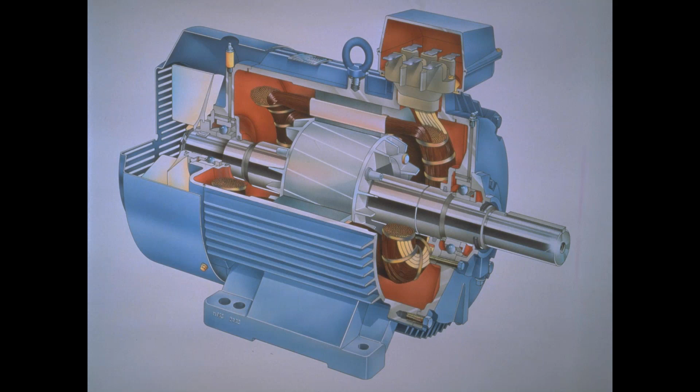So you have a rotor, we have a stator, we have windings and insulation, we have this housing, we have the fan on the back. You can see a lot of different components here that can actually fail while the motor's in service. Sometimes these components fail while the motor's in storage, and we'll talk about that as we go through the presentation.

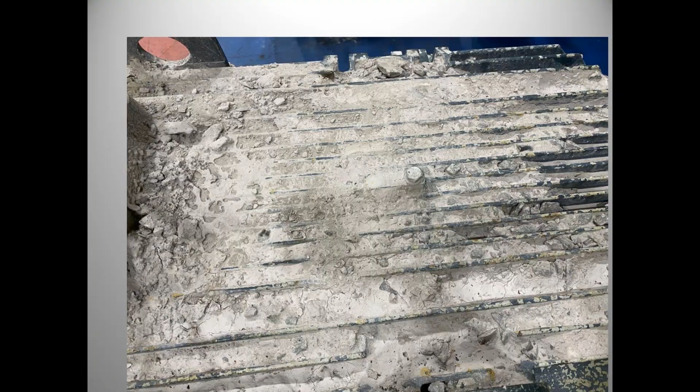This is a picture I took of one of my customers, but this motor was sitting on the shop floor, and I asked why the motor failed, and they said it just overheated and stopped turning. Well, it overheated and stopped turning because you have all this product on there. The motor couldn't cool itself, was probably one of the reasons that it got hot and failed. So you see these kind of things in the industry quite often.

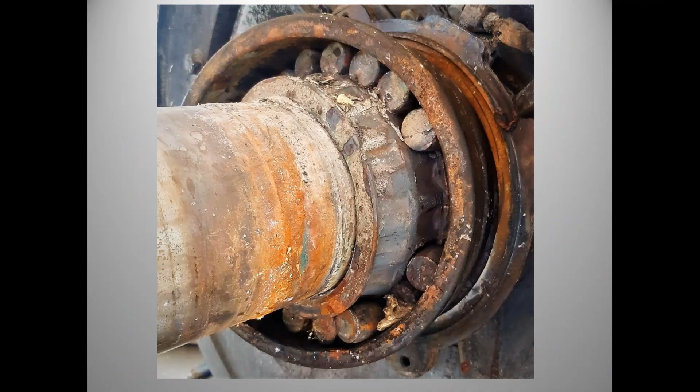Here's a large motor, this picture was taken at a mine down in Suriname, and again, large motor, but you can see lack of lubrication, some major water issues around the bearing, but a major bearing failure here.

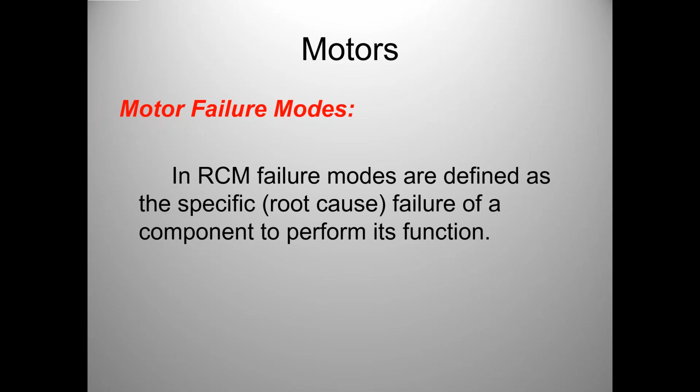As we look at things in terms of RCM, you have to define these specific failure modes, and I break this down to the actual component actually failing in the motor. So again, we can look at all these different components. In articles I've written, there's over 50 failure modes of electric motors out of these 8 or 10 components. I'll show you a slide where you can see a few extra components that sometimes we don't think of as being a failure mode, but there's over 50 failure modes of electric motors.

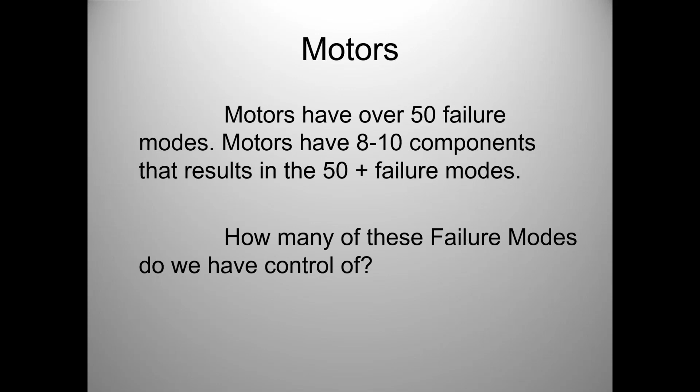I'll cover some of the slides kind of quick today because I wanted to make sure we get them all in there. I do have an article on this too, if anybody wants the article, just shoot me an email.

If we break the motor down into some main components, we have the housing, the stator, the rotor, bearings. Bearing seals I break down as a different component because sometimes that causes failure modes of our bearing. The actual bearing housing that the bearing sets in on the end of the motor can be a failure mode depending on how many times it's been rebuilt, how much the rotor's been out of balance, what kind of corrosion there is inside that housing. People don't think of the fan being a failure mode. I'll show you a couple slides about how that fan can cause some major failures of the electric motor when it's not working properly. Windings and insulation, shaft, and the fan guard. So those are the main ones I cover in my training.

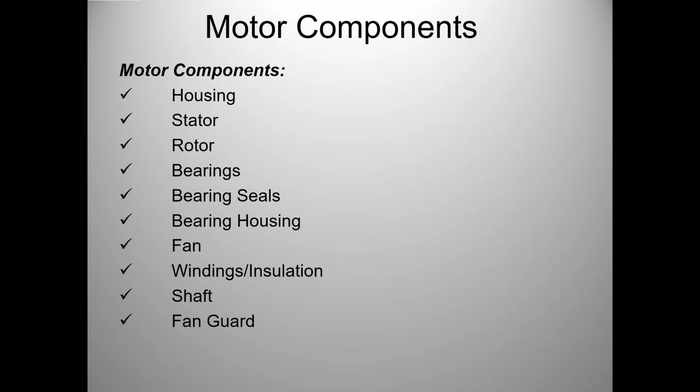One of the plants I went to, one of the maintenance guys pointed out, well, one of the ones you don't cover is a failure of the eye bolt. So I asked the question, well, how can the eye bolt fail to cause the motor to fail? He told me about picking a motor up, had it about 90 feet in the air, and the eye bolt broke, and then the motor fell to the concrete deck. Well, that's a failure of the eye bolt that caused the motor to fail for sure.

But explaining that, the eye bolts they stick in electric motors are just malleable steel eye bolts. They're not rated. So if you're going to pick motors up by the eye bolt, you should buy a rated eye bolt, just to give you that pointer, because those are about the cheapest eye bolts you can buy, the ones they ship in there. They're just kind of to move around the shop floor. They're definitely not designed to pick up 90 feet in the air.

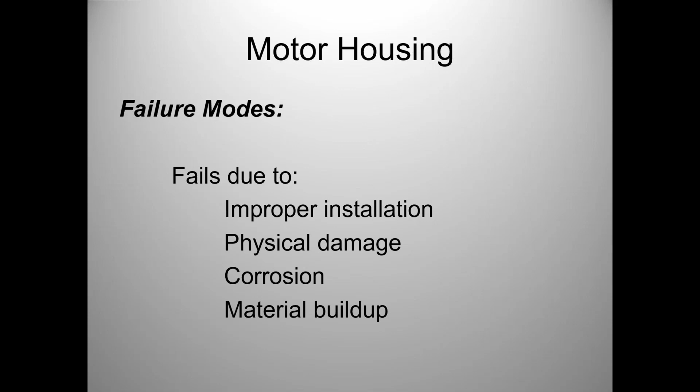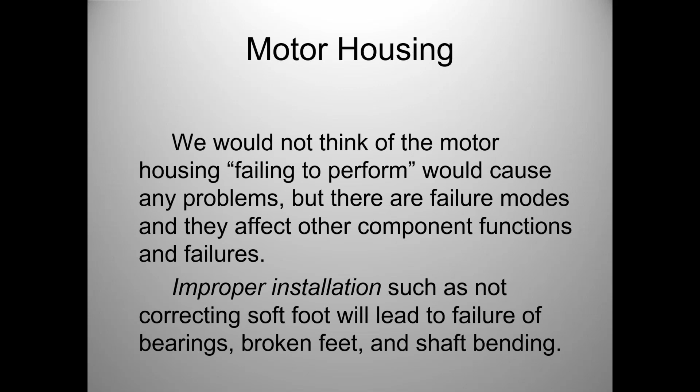If you think of the motor housing, sometimes we don't consider it, but improper installation can cause the housing to cause the motor to fail. Physical damage of the housing, corrosion, material buildup—we looked at pictures of buildup on motor housings. You wouldn't think of the housing, but if we do improper installation and don't correct soft foot, we put that housing in a bind, and by putting the housing in a bind, we can actually cause the bearings to fail earlier.

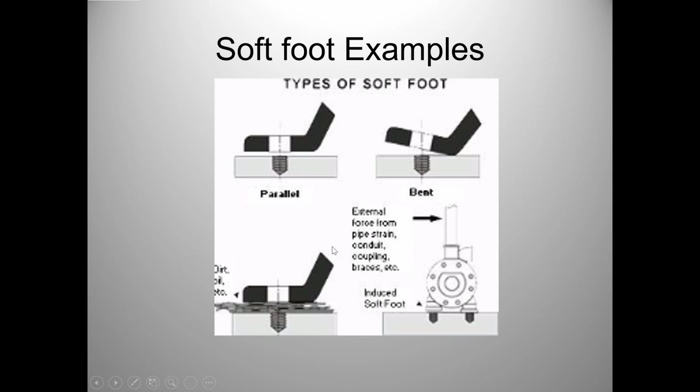An example of soft foot: most electric motors, just about all of them except Toshiba, if you lay them on a perfectly flat surface, one or more of the feet will not be touching the surface. If a maintenance person doing reactive maintenance just tightens this down, we can put that motor in a bind, or we can have conduit strain or some other kind of strain on the motor.

We can put the motor in a bit of a bind this way, which puts pressure on the bearing housing—extra bearing stress that can cause the motor to fail early. So we have to correct soft foot conditions or buy motors that don't have that extensive soft foot issue, which Toshiba makes.

A couple of questions came in. Someone asked, are you saying the factory installed eye bolt is not rated for the weight of the motor? Normally they're not—they're malleable steel eye bolts, not rated. If you look, there's no rating on them. So I'd suggest if you're going to use that eye bolt, buy one that's rated for that weight, or 50% above that weight.

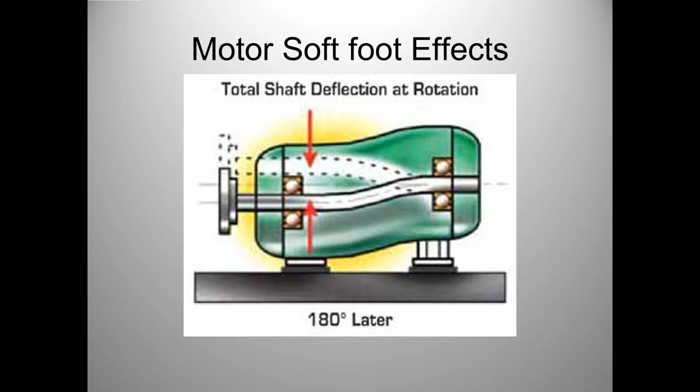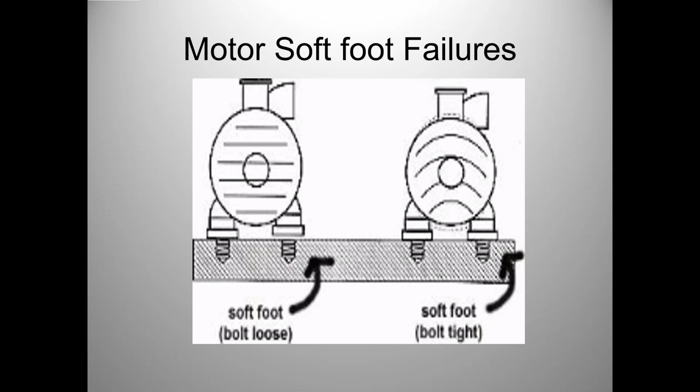Someone wanted clarification—are you saying those soft foot issues are an exception on Toshiba motors? It could still happen with Toshiba, but Toshiba grinds all the feet of their motors to within 1,000ths before it goes to the paint shop, and guarantees flatness to 3,000ths. None of the other manufacturers do that. It's easy to test on a flat surface—you'll find one or more feet don't touch, and if you don't fix it, you put the motor in a bind.

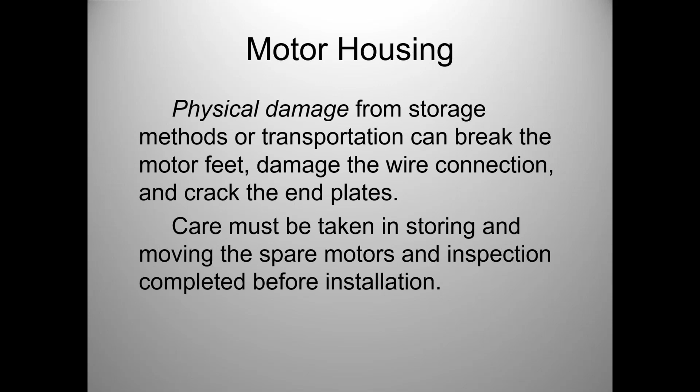On motor housing from storage—I've seen motors at a number of plants in storage where you'll see a foot broken off, a foot bent, or damaged wire connections on the housing. So storage of your spare motors, taking care of them and doing inspections, is very important.

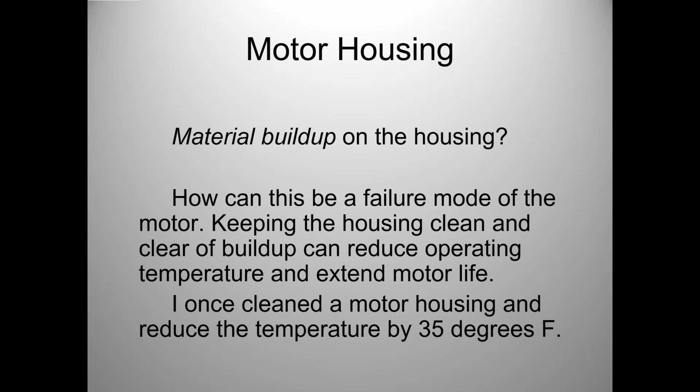Material buildup on the housing—I showed a couple pictures earlier, and I'll show more as we go. The housing needs to be clean so air can move across it, and the lower we get the temperature on that motor, the longer the insulation will last. I'll show you a picture of a motor up in Canada where I cleaned the motor and fan housing, and the temperature on the front bearing dropped 35 degrees. For every 18-degree rise, you cut the insulation life in half. We'll cover that more later.

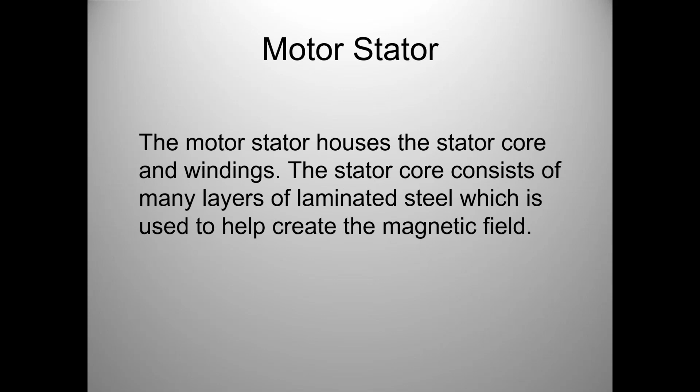Now the motor stator—this is the core of the windings. It consists of many layers of laminated steel which help create the magnetic field to turn the rotor. How can it be damaged? Physical damage during the rebuild process—I've been at many mines where they rebuild motors, pulling the rotor out and changing bearings in the field, which can damage the stator. Also contamination, corrosion if moisture or chemicals get inside, high temperature, and voltage imbalance, which can destroy a stator just from the vibration it creates.

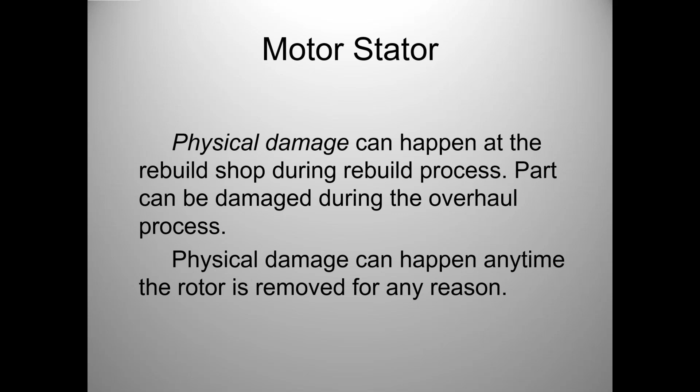Broken supports, and sometimes rewind burnout procedures will damage the stator—we'll talk about that one a bit. Physical damage can happen at the motor rebuild shop, but it can also happen at your facility if you're changing bearings on the rotor on-site. A lot of times this happens at the mine because you can't shut it down long enough, so you change the bearings in the field.

Contamination, storage methods. I've taken motors apart that have been stored without keeping that grease cavity in the front full, and they're corroded, rusted inside. So again, we have to watch for contamination inside the motors during storage and in some applications where there's lots of water.

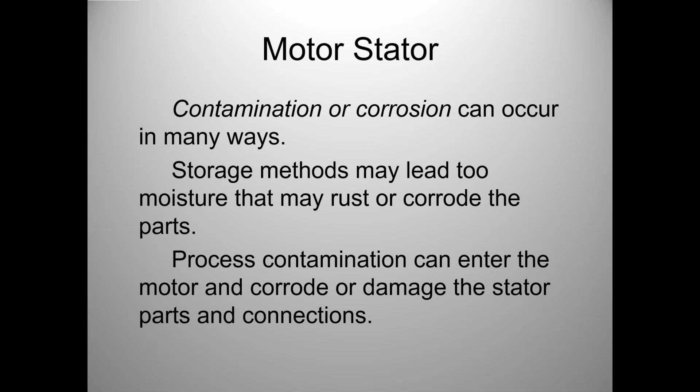High temperature of the motor, maybe a short circuit or a fire or something, or some extra heat around there can damage that stator.

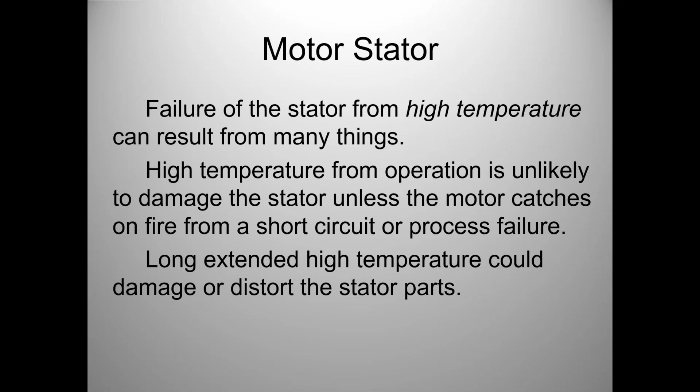Voltage imbalance is one that we don't have commonly here in the US, but I've been in plants around Africa and South America that are running off of generators and have other issues. You'll have voltage imbalance between the three phases, which can also set up vibrations in the stator and cause it to fail early.

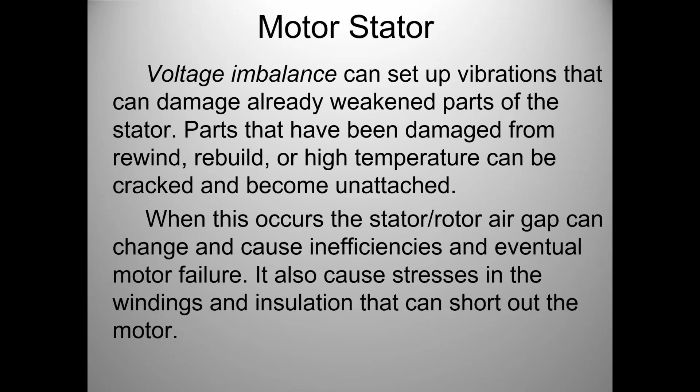I put this chart in there just for your general information, but you can see the effects of under voltage and over voltage on the different conditions of your motor as far as efficiency, power factor, starting amps, and maximum torque. So look at it when you check it.

In the U.S. you don't run into this problem very often, but there are plants in Canada that run at a different voltage than we run here, and some others. So it's something that has to be watched and considered all the time.

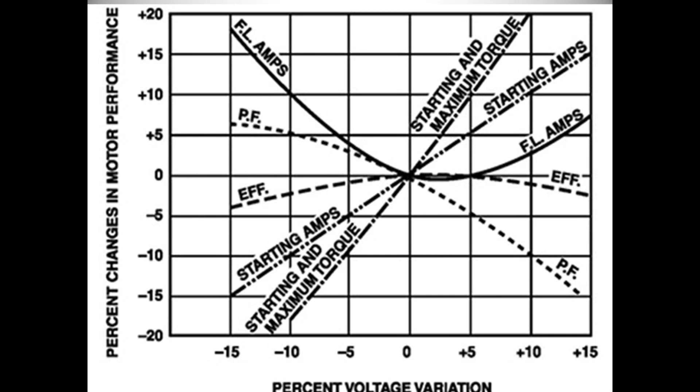Rewind burnout procedures - this is one I cover extensively in my training on motor repair. With windings in an electric motor, you send an electric motor in, and one of the things we have a bad habit of doing is telling the motor rebuild shop, I need that motor back as quick as possible. Well, there's a procedure on how you take the windings out of an electric motor.

You actually put a core heater, put it in an oven at 650 degrees, and basically bake it for 24 hours, and then the insulation falls off the windings, and you can remove the windings after it cools.

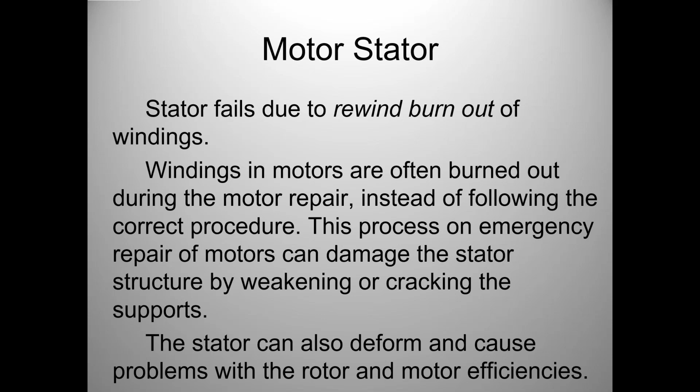Well, if you say I want the motor back in 24 hours, one of the main procedures they use is they take an acetylene torch and burn all the insulation off the windings to get them out. But when you do that, you unevenly heat that stator. The stator can come back egg-shaped. You can heat them up enough that the stator supports to the wall of the housing will break off. So lots of bad things can happen with improper rewind burnout procedures.

I was in one down in Singapore where they were rewinding, and the wire coming off of the spool was dragging across the floor as the guy was putting the bends in it, picking up dirt and dust, and the motor shop was really dirty. So I failed them within 5 minutes of being in the motor shop just for that reason, because this company was having trouble with the 5,000 horsepower motor failing within 8 months after the rewind, and there were just lots of bad practices. So it's got to be clean, and the coil wire's got to stay clean.

Your rotor is constructed in many layers of laminated steel, consisted of bars of copper or aluminum alloy that are shorted with shorting rings at the end.

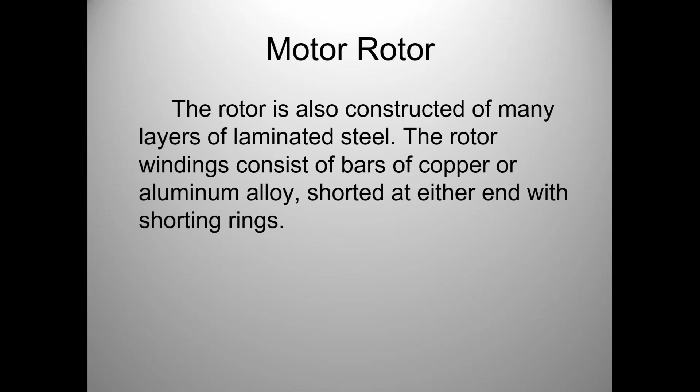But again, physical damage from taking the rotor in and out, imbalance - a lot of rotors are not balanced even properly from the factory. Broken or cracked rotor bars, contamination, improper installation can cause your rotor to fail.

Hey Terry, yes - I've got one more question, kind of related to right now. What if you can't prevent a motor from being covered up with a product that acts as an insulator when it's on the motor? Well, yes, sometimes you're going to have to put a bigger motor in, or you're going to have to somehow get some kind of cooling around it if it's running hot.

But most of the time, I've been at plants where we put even covers over the motor to keep the product off the motors. But yeah, you're right, there are some cases where you can't do that, but as much effort as can be made as possible to keep it cool. Otherwise, you're probably going to be changing it a lot more often. Okay, thanks. Yep.

But physical damage, very, very common. Here's a motor rotor that was damaged and shorted out. You can see the burnt spot in between the gaps of the rotor there.

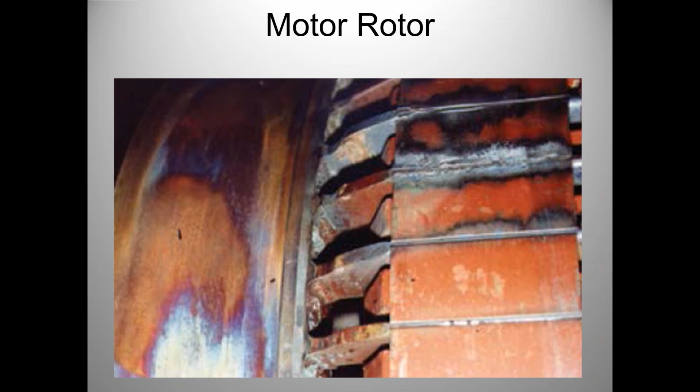Imbalance. Now this is something where Toshiba and WEG motor, they're the only two that I actually know of that balance below the EASA standard. They balance down to less than 0.05 inches per second, where a standard motor is balanced in the range of 0.08 to 0.12 inches per second, which is okay.

But when I was back at Cargill, we tested some brand new motors from Reliance that had never been out of the crate, and they came out of the crate at 0.28. They were 150 horsepower motors. Well, the bearings in those motors at that balance standard, those bearings will fail in 1 year.

So again, if you have critical motors, and I know the nuclear industry does this, they check balance on all the motors that are rebuilt and have some standards, but something you may want to have that motor checked on a balance machine before you put it on to get long life. So the better it's balanced, the longer the bearings will last.

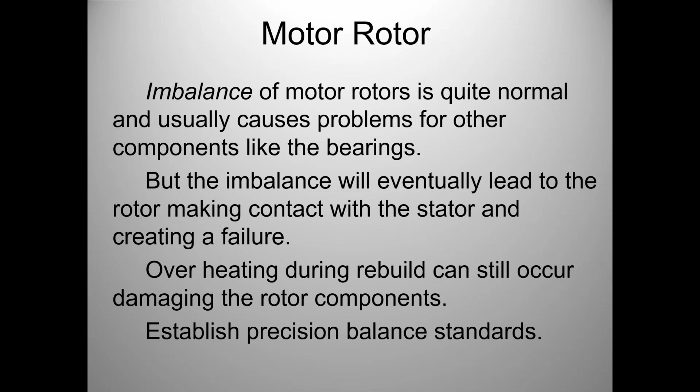Broken rotor bars, there's some new motors that use poor materials. I won't mention any of the motor, but some of your cheaper motors, they use some poor materials in their rotors, and you will get broken rotor bars.

Now, expansion, when you have a motor that starts up and gets hot and shuts down and cools off, and it goes through a lot of startup shutdown processes, can also crack a rotor bar. But again, vibration analysis will pick this up. MCE testing and mechanical ultrasound can pick up cracked and broken rotor bars on an electric motor.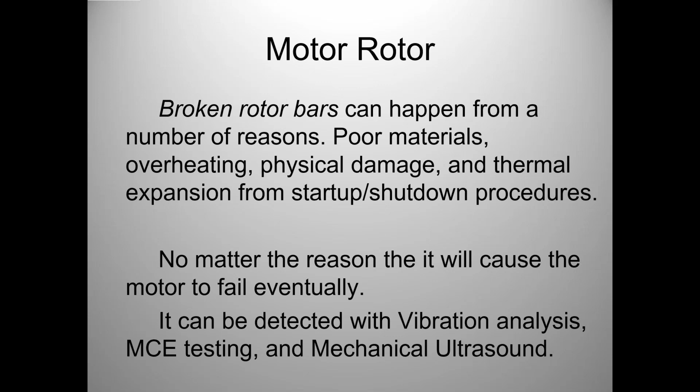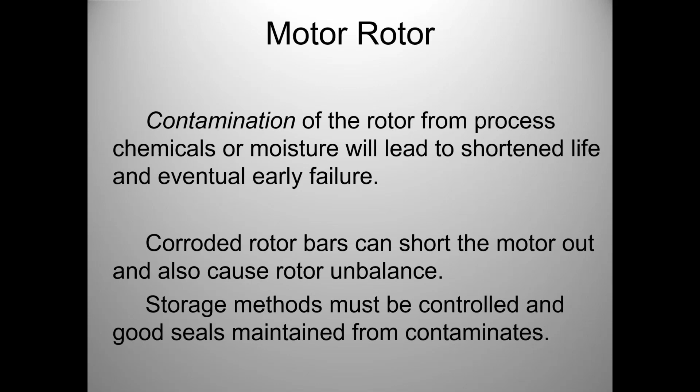Contamination, again, just like your stator, from chemicals, moisture that's in the area, poor storage methods. You get corrosion on your rotor bars and short them out. So again, issues you have to watch even in storage and in some of the areas. And I know everybody's got industries that they're in the fertilizer industry, where you have a lot of contamination from corrosion. So you have to be very careful with this.

Better seals, labyrinth seals on the front would help. Your motor bearings, how can they fail? Well, improper handling of the bearing, that could happen at the motor rebuild shop or at a mine. Improper storage, improper installation, and we all know about the effects of misalignment on motor bearing wear.

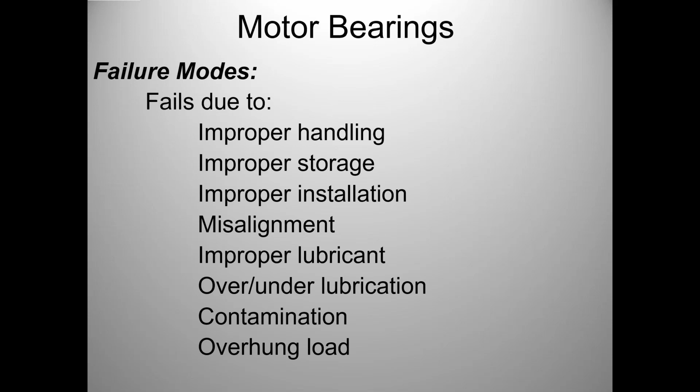Improper lubrication, we'll spend a little bit of time on lubrication. Over and under lubrication. Contamination of the lubricant is a key one. Overhung load. But improper handling of the bearings in storage, and this is one of the things I always look at when I help people with motor shop audits.

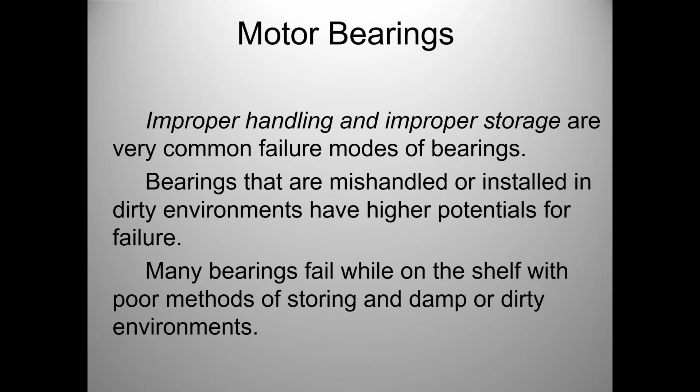How are you storing the bearings? I don't like to see them laying out on somebody's workbench before they go on. They should come right out of the box in the paper and go right on the motor and be covered up. But when I do my bearing training, a lot of bearings will fail on the shelf just from poor storage methods in damp and dirty environments.

Improper installation, not using the right tools to check your tolerances. Bearings have to have a specified shaft tolerance and also a bore tolerance in the motor housing, so that can cause a motor to fail early.

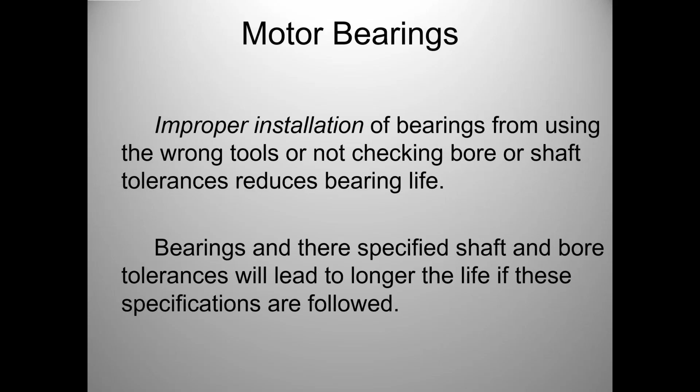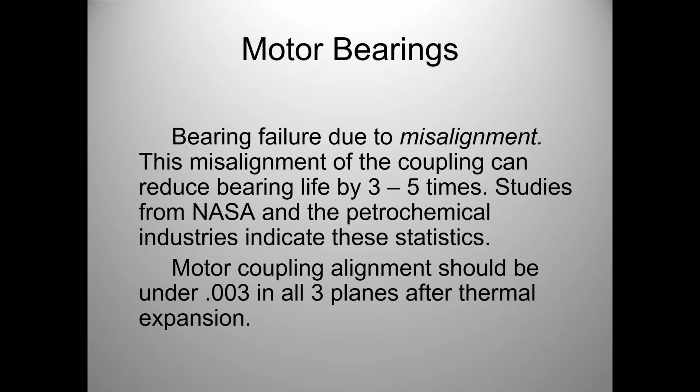So you always want to make sure that they're using that tool in every rebuild process. Misalignment, there's lots of training on misalignment, coupling misalignment, but you need to get within 3 thousandths on all three planes after thermal expansion. But it says here, 3 to 5 times more life with precision alignment.

Improper lubrication, and again, making sure you're using the right grease. Electric motor grease is supposed to be a polyurea grease that doesn't have electrostatic properties, because in every motor, the rotor actually builds up a charge, and that charge has to be released somewhere. So the easiest place for it to go to ground is through the bearing.

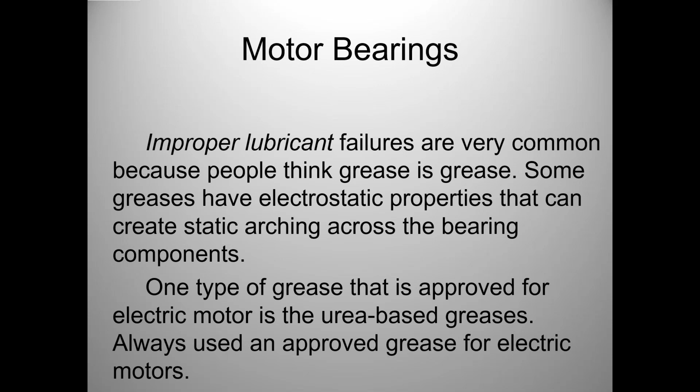So by using a proper grease, like a urea-based grease, it's less susceptible to go through the balls and rollers of the bearing. This is especially important on motors that are driven by VFDs. You actually get more of a rotor charge on a VFD motor than you do a standard motor, where it has to go to ground.

I had to teach the mines down in Suriname. They had all their big motors stored in just lean-tos where they were getting wet. So we went out and took the plug out and made sure these cavities are completely full, so that moisture in those humid jungle environments doesn't get inside this motor.

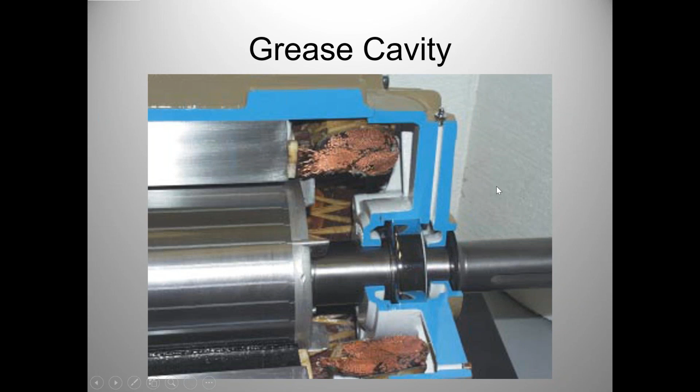So it's just a good practice, and a good practice while the motor's running, making sure you use the right grease. This is a Mobil Polyrex grease, but any motor you use, it should be an EM-rated motor grease. It doesn't have those properties.

Understanding what kind of bearings - I've done a lot of training on this because people don't understand what kind of bearings are in the electric motor. Some motors are coming with sealed bearings. Some motors are coming with shielded bearings, which means this seal doesn't go all the way to the edge, so grease can go in and out. Some motors are open on one side, closed. You have to ask your motor vendor what kind of bearing I have in there. Then that'll help establish what your lubrication practices are going to be.

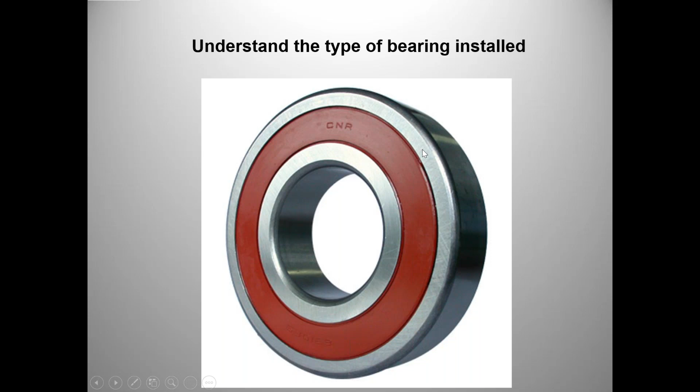So an example here, this is a shielded bearing. The shield doesn't come all the way down - there's a gap here. So if the grease gets hot, some would release. And a major reason you want to keep this cavity full here, so some lubrication can flow back into the bearing. So understand the difference between a seal and a shield.

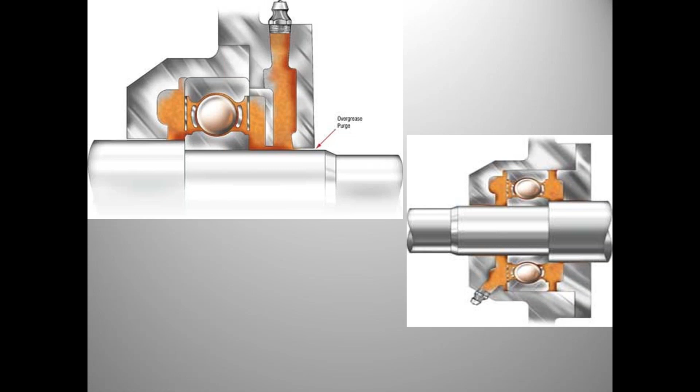Over and under greasing, this is what we're going to get into. This is where UE has helped so many companies with this problem with their tools. I've been using some of their tools for motor greasing for years and years. Over and under greasing is a very common problem. For the over greasing part, make sure you take that bottom drain plug out so you can't push grease into the motor cavity.

Here's a motor here that was over lubricated, where we pushed grease into the cavity. This was in a motor rebuild shop in Houston, and the guy's running around with a battery powered grease gun, greasing this motor, and the grease got into the windings and shorted it out. Here's one here where it actually caught on fire when the bearing failed.

But you can buy these little reliefs. Now, my plan, I took the drain plug out and put a little 1/8 inch ball valve on the bottom of the motor to relieve the grease. These little stainless steel ones - I mean, this is probably 20 years ago, they were $3. They're probably $5 or $6 now, but you can put those in place of your plug. Then when you're greasing, this little spring pops open and lets the grease out. These come standard now on Toshiba motors, and I've seen some Reliance motors with these on the bottom side.

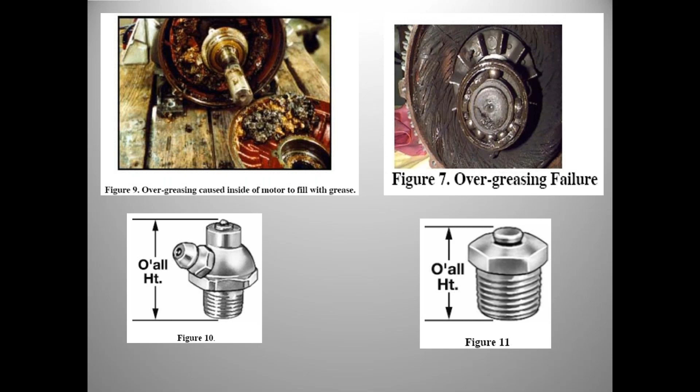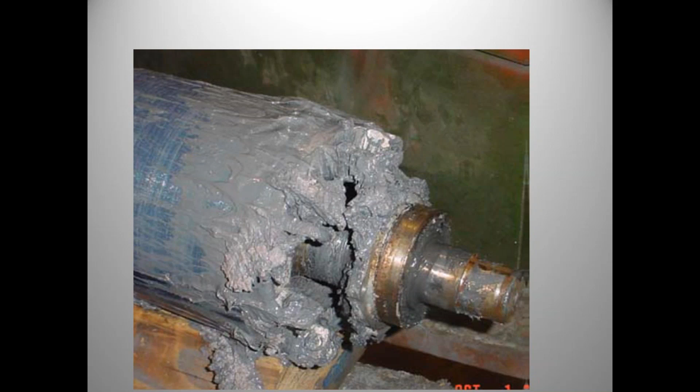So now this is a story here. This was a new maintenance person with not much experience. His instruction was to go out and take the bottom plug out and grease this electric motor until grease came out. Well, after one tube of grease, no grease came out, so he put another tube of grease in, and the motor shut down. Then you can see what it looked like when they pulled the rotor out. But again, not explaining things - if you get to 15 shots or 10 shots, stop, which is something that, when you do the UE training, you don't just keep greasing until that reading comes down, because sometimes it doesn't come down. So you have to use a little common sense there, but this is definitely an over-greased rotor.

I bought this tool back in the mid or late 90s at my plant, and immediately when we started greasing bearings and electric motors with this, our grease consumption went down 30%. This is UE's 201 grease caddy. You just put the probe on here and grease the motor till it stops making noise when it's got a high reading. Watch this reading come down to a point, and when it goes back up, you should stop.

These are very good devices for lubing. They have the 401, which has a digital screen on it. But now they're OnTrak where they're actually monitoring what's going on in this bearing all the time, and it tells them when this bearing is going to need grease. So get some training on this, because this is the future of lubricating bearings, especially on critical equipment. I just listened to a presentation on this a few weeks ago, and it's definitely what you ought to be using on your critical motors and critical bearings. Excellent, excellent system.

Contamination - one of the nice things about auto lubers is we don't have to put a grease gun on there anymore. A lot of critical motors that some of my customers have, where they're out by the ocean with saltwater contamination, lots of dust and dirt or moisture around, we put an auto luber on there, and it puts the right amount of grease in there and keeps that cavity full. Going back to this system, you can do the same thing, making sure it's got the right amount of grease in the system.

Overhung load - putting sheaves and pulleys on there, you're actually pulling on the side of the bearing, and it's going to cause ball bearings to fail. But I always remind people that on any motor above 10 horsepower where you have a sheave, a sprocket, or something with side pull, you can put a roller bearing in the front instead of the ball bearing, and the bearing's going to last 3 to 4 times longer. A lot of people don't know that - they just change motors out and put a bearing on a sheave-operated motor, and the bearings will fail. So keep that sheave in. It shows here on the fan shaft, and it's the same on the motor shaft - keep that as close as possible to the motor or the bearing.

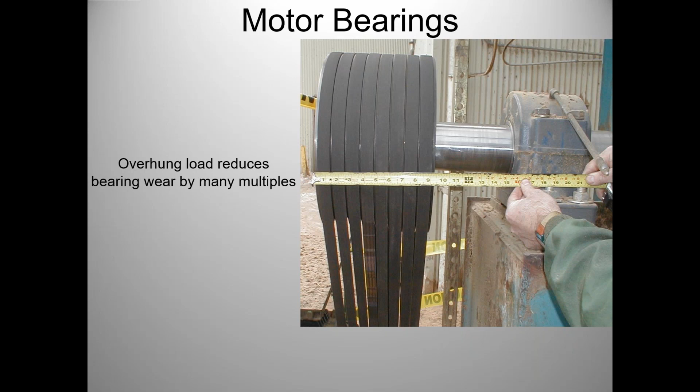Reduce the overhung load. Bearing seals - you can blow your bearing seals with over lubrication or improper installation. So be careful when you're lubing your electric motor that you don't have over lubrication type problems.

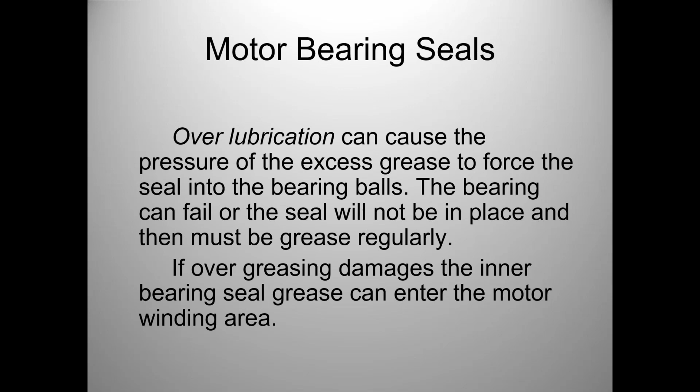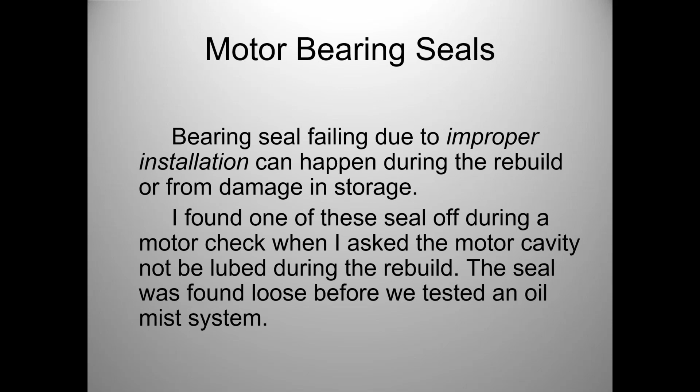The different seals - this is a labyrinth seal. A lot of your motors just have a rubber seal up front here, but if you have environments with lots of moisture and contamination, you can have labyrinth seals put on. Toshiba, Reliance, everybody will install labyrinth seals on your electric motor shafts.

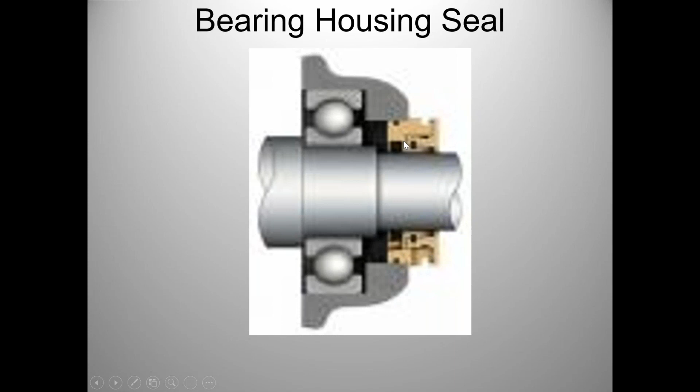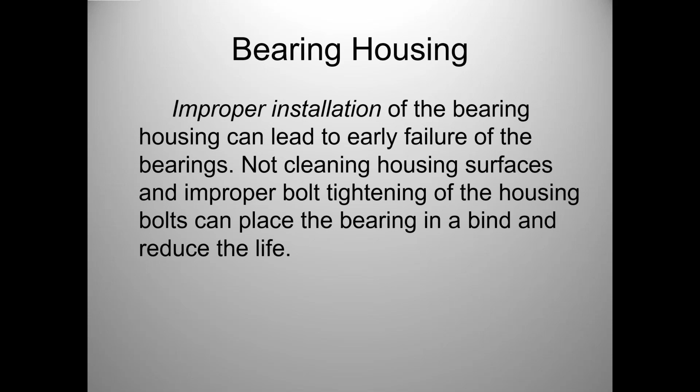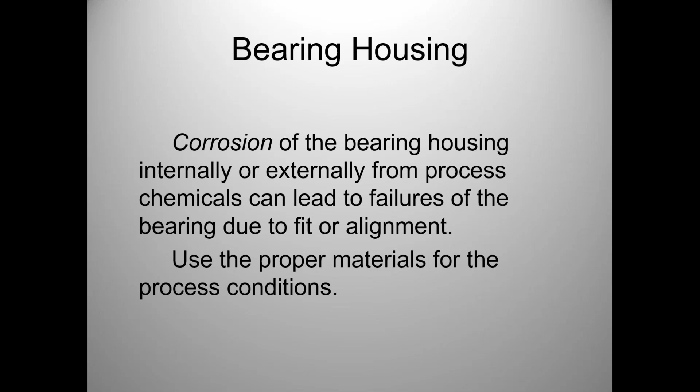Bearing housing - improper installation, corrosion, that improper tolerance I talked about from wear. If you put that housing on and don't get it right, or don't tighten the bolts correctly with the right torque, it can cause that bearing to be damaged or to move around in that housing. Corrosion is a big one in some chemical plants, or especially fertilizer plants, where you get moisture down in the bearing housing and it actually corrodes that housing. It's something your motor rebuild shop should be checking and correcting, because once that bearing starts moving around in there, it's just going to wear it and make that bore larger and out of line. Make sure they have that tool I showed you earlier for checking, and make sure that bearing's not floating in there. And if you have imbalance of the rotor, it's even worse, because the bearing will actually bounce around inside of that housing.

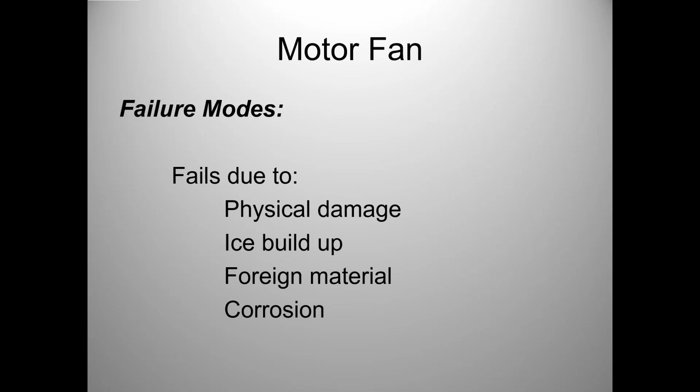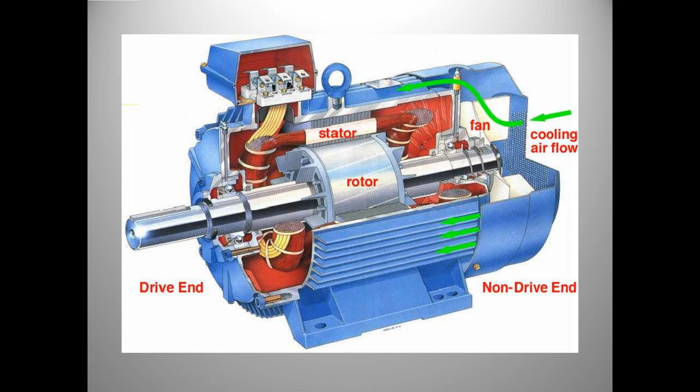Your motor fan, sometimes we ignore this fan on the back, but it can cause a lot of failures of your electric motor from physical damage. In the north, in cooling towers and similar equipment, ice builds up on that fan when starting and stopping, and that ice can break the blades off. Foreign material and corrosion too. The whole idea of this fan is moving air across the electric motor to cool it, and the cooler we keep the motor, the longer the insulation will last.

Here's an example from one of my customers. Supposedly the PM had been done on this electric motor the day before, so I took the maintenance person and the operator down there to show them. We read the temperature on the front of the motor, about halfway between the shaft and the top edge where the grease zerk is. We cleaned the motor off, cleaned the fan guard and everything else, and the temperature dropped 35 degrees Fahrenheit.

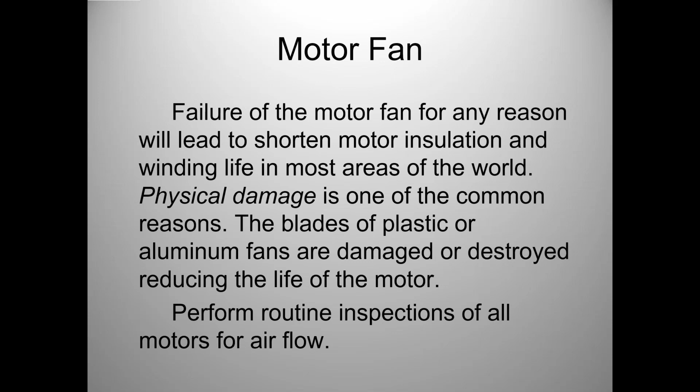So what does that do for the electric motor? For every 18-degree rise in the motor, you cut the insulation life in half. So we've more than doubled the life of the insulation just by cleaning the motor. Ice buildup, corrosion - but here's the thing: for every 18-degree rise, you cut the life of the insulation in half.

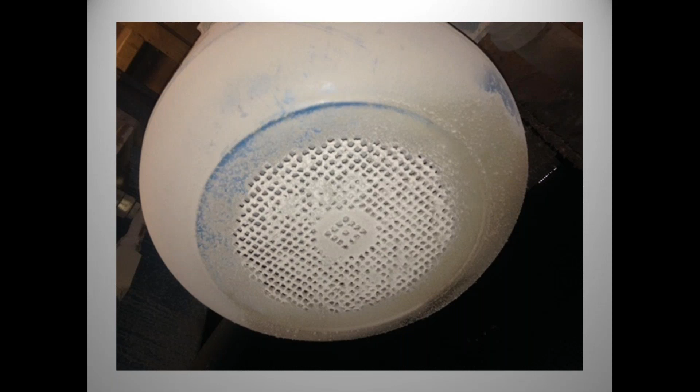Your motor fan guard - with plugging, this is one of the things I see a lot in the textile industry and grain elevators, where you'll go back and the back of the motor is plugged with dust and dirt. I've got thermal images showing where the cooling air is not flowing across the motor. This can be an operator PM task, and it's not hard to do if you do it every week or every month - keep that dust off so you get good airflow across the motor. Very common in the industry.

So again, it's a PM task that needs to be done to lengthen the life of your electric motors.

If they use good rewind procedures, you can still lose 3% efficiency on the motor. So after you've rewound an electric motor 3 times, it may be 9 or 10% less efficient. It may be more economical, from a cost standpoint, to put a new, more efficient motor on there. But you have to tell your electric motor rebuild shops - of course they're going to rebuild them as many times as they can because that's how they make a living. You need to set some specifications.

One specification I always tell people: when you send your motor into the electric rebuild shop, they should balance the rotor to less than 0.05 inches per second. I don't care what kind of motor it is, whether it's a Baldor, a Dayton, or any of the cheaper brand motors - balance that rotor to that lower standard and your bearings will last much, much longer.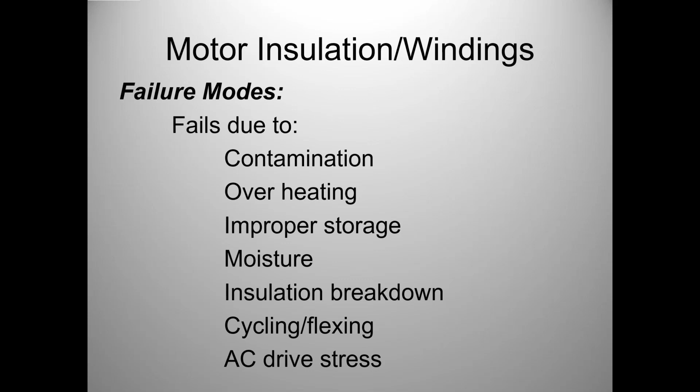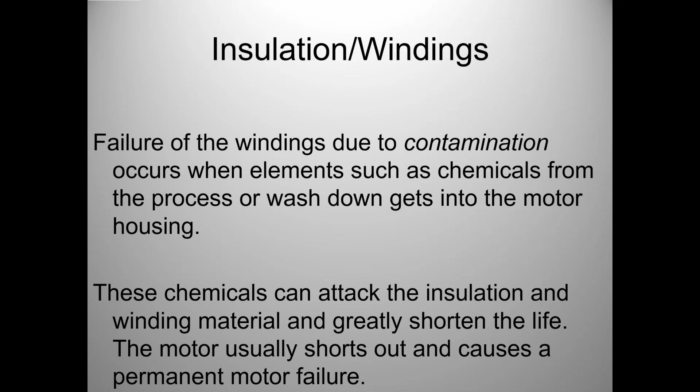Your motor insulation and windings - I combine these two together, but contamination, overheating, improper storage, moisture getting in, insulation breakdown, cycling and flexing, and AC drive stress all play a role. We've talked a lot about contamination from some industries and moisture, so we have to watch this and keep that cavity sealed so stuff can't get in. Overheating can come from just your fan not working, or maybe an external source of heat around it causing the insulation to fail. Again, every 18-degree rise cuts our insulation life in half.

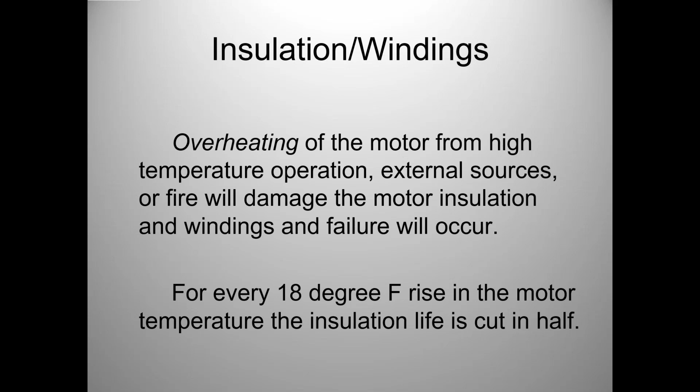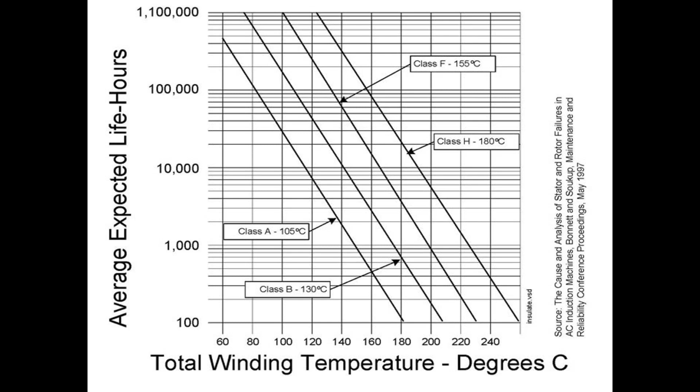I put this chart in here again for your general reference, but a lot of cheaper electric motors come to you when they're brand new with Class A or Class B insulation. When you rebuild the electric motor, have the shop put Class F insulation in. Toshiba's come standard with Class F. If you have high temperature applications, you've got Class H. Not every instance, if there's room, but in just about every motor you can go to Class F insulation and extend the life of your motor, especially if it's running in hot areas or you're having trouble keeping that motor clean. When the motor's rebuilt, use Class F. Cargill standard for every motor that's rebuilt, they put Class F insulation in the rebuild.

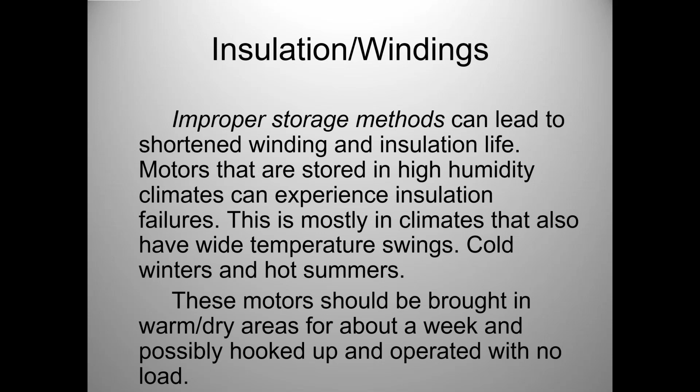Improper storage, we talked about that. Temperature swings at the plant I came from - we didn't have any inside ambient place to store big electric motors, so they were in an outside warehouse that could be -20, or it could be 120 in the summertime inside that place. So the motor's going through big temperature swings in storage, and you can actually pull moisture into the windings and cause failures.

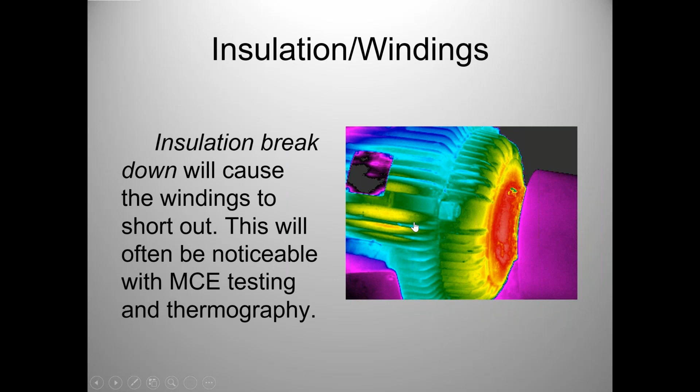Here's one here where we have a hot spot on the side of the electric motor with a thermal imaging spot. It's good - so this MCE tested and infrared will detect some of these potential failures. Now, this could be an issue in the future, but it's something we can watch.

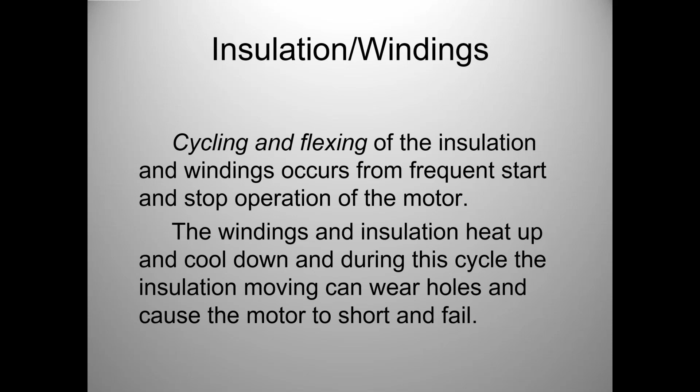Cycling and flexing - FLIR had a very good drawing or video of this a few years back that I saw, I couldn't get a copy of it, but when an electric motor starts up, the windings on the electric motor, the windings of insulation, they actually move as the motor comes up to speed. So the more times you start and stop that electric motor, the more chance of wearing the insulation off on these windings.

Now, the exact same thing happens with variable frequency drives. VFDs nowadays are what's called pulse modulated, so they send pulses of voltage to the electric motor. And as that electric motor is receiving those pulses, these windings are actually moving. So that's sometimes why people say, if you're going to have a VFD on the motor, make sure you get a VFD rated motor, which has usually extra insulation, or it's a next size bigger motor. VFDs will actually wear the windings out on your insulation. So again, something to remember.

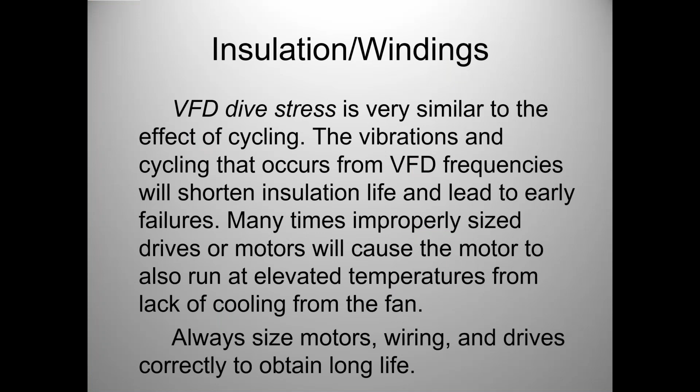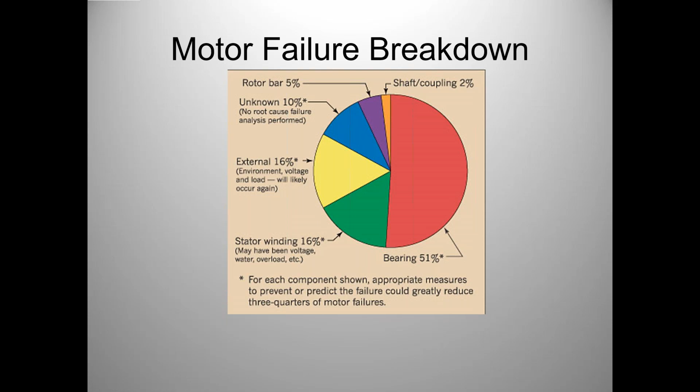Here's a motor failure breakdown, and you can see bearing failures are 51% of motor failures, which if you look at misalignment, balance, and lubrication, we can eliminate 51% of motor failures. Then stators and windings, we talked about a few of those things, rotor bars. There's a few unknowns, which could be storage. Lots of different things here, just looking at this chart. But remember, if bearings are 51% of motor failures, we got some information today on how you fix that.

So some slides here, preventive maintenance for electric motors. Grease motors as needed with a proper rated grease. If you need, I can send you a little chart on what the manufacturer recommends for relube frequencies, but there's a lot of factors. In fact, I wrote an article, and I think UE has it, on all the different factors that affect how often you should grease an electric motor - there's about 20 of them. That's something you can check with them on, or shoot me an email, but I like to get that in everybody's hands because everybody thinks, well, I'm just going to grease my motor two shots every month, but there's a lot of conditions - moisture, temperature, balance, load on the motor - that's going to affect how often you lubricate.

If you have big motors that have oil lubricated bearings, like on a big ID fan, change that oil often or get oil analysis. Usually there's not enough oil in there to warrant oil analysis, so I just tell people to change it more often, because a lot of times it looks good in the little sight glass and bulb, and it's not - it's dirty.

What does this mean? Perform hands-on inspections weekly. That's one of the things I required my operators at my plant to do. I said, put your hand on that electric motor every day or every week for vibration, for temperature, and to make sure I've got good airflow across that motor. So that was one of the main things they were checking for - is the fan blowing airflow across the motor, and is the motor clean. Store your motors correctly away from moisture, and keep moisture and chemicals away from motors if you can.

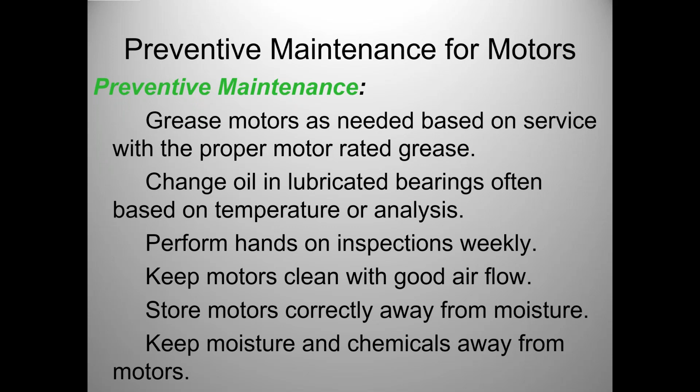Precision maintenance. Always align motors to under 3 thousandths in all 3 planes and eliminate soft foot. Always specify precision balance on your rotor. When you send your motor to a motor rebuild shop, have them balance that rotor to 0.05 inches per second or less.

There's a lot of motor rebuild shops that are supposed to check rotor balance on every rebuild. It's usually not done because we're asking for it to come back real fast in a lot of cases, but give them that as standard. So the standards we talked about today: make sure you get precision balance on the rotor, use class F insulation in the motor when they're doing the rewind, and make sure they're checking that bearing bore.

Use certified motor rebuild shops, and sometimes you have to make a decision: am I going to buy a new motor, or are we going to rebuild it? At Cargill, before I left, any motor under 50 horsepower we didn't rebuild, we threw it in the dumpster. I was at a couple refineries in Texas where their number is 100 horsepower. If a 100 horsepower motor fails, it goes in the dumpster and they put a new one on. Now, most of us can't afford to do that, but we have to still make some decisions.

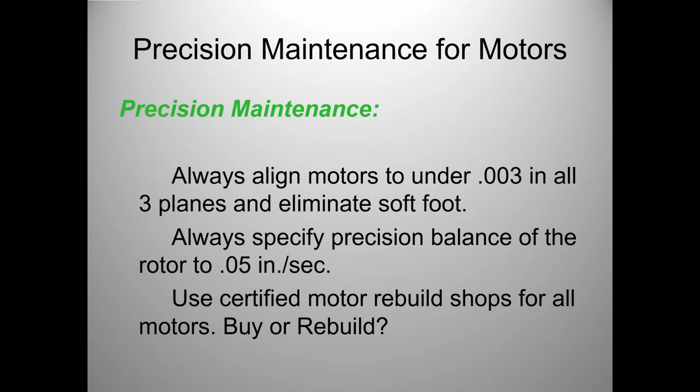You shouldn't be rebuilding or rewinding them more than 3 times. I wrote an article for UE back in the 80s about a 7-year stretch when I started using the UE tools where I didn't lose a single motor at a pretty large facility on emergency downtime, because we read the bearing readings on our UE tool every month and took the motor out and had the bearings changed when they got to a certain point. So there's something to be said for proper testing with these UE tools.

Predictive maintenance. There's all kinds of ways to predict motor failures. One of the real good ones is motor circuit evaluation. A company that sells this stuff, you can find 100 different things wrong with your electric motors with just this one tool.

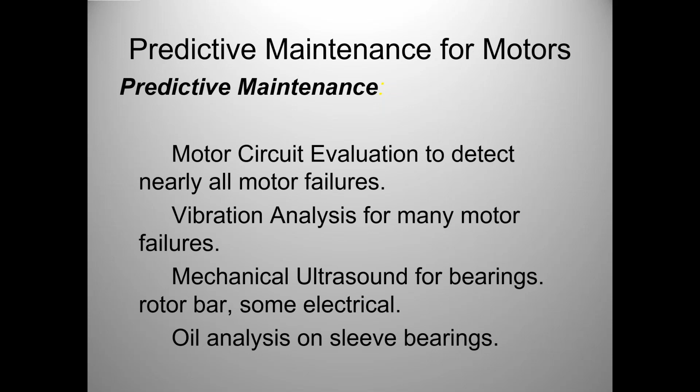Vibration analysis picks up a lot of motor failures. Mechanical ultrasound, the new 15,000 - I'm amazed at all the things you can pick up with bearing faults, rotor bar faults, and some electrical faults with the mechanical ultrasound tool on electric motors. Amazing technology, some of the new stuff you can do with that. If you have sleeve bearings with oil, make sure you use oil analysis or just filter and change that oil more often. Lots of things in the precision, predictive, and preventive maintenance area for our electric motors.

Some proactive maintenance - what do I mean by this? Purchase precision motors for critical applications. What do I mean by precision motors? At Cargill, we found out Toshiba has better balance standards and better insulation standards. When we did our asset criticality in our facilities, we put Toshiba motors in the top 20% of our critical equipment because those motors were better motors - they were going to last longer due to their construction.

Now, I'm not saying you want to put Toshiba motors on everything, because you have motors that aren't going to cost you much if they fail, but precision motors for critical applications is key.

Certified motor rebuild shops. Cargill certified a bunch of motor rebuild shops back in the early 2000s because we were finding out we were getting motors back that weren't rebuilt properly. So we did some motor shop audits. I've done a few motor shop audits for people, but there are companies that do that for a living.

Again, this comment: make sound decisions. Should I rebuild it or should I just buy a new one? Use precision maintenance every time you put that motor on. A lot of times in the reactive mode, we don't use precision maintenance, we don't do our precision alignment, we don't do our precision balance, and precision lubrication, making sure that grease zerk is clean if you're going to keep greasing it with a grease gun.

I've got I don't know how many pictures of dirty grease zerks on electric motors at cement plants and other areas where you're just pumping particles into the bearing, especially if they're open or shielded bearings. And then, of course, like we talked about, all the new equipment that UE has out there to make sure we get the proper amount of lubricant in the bearing at the right frequency. That's key, not just going off of some chart that the industry's put together saying give it 10 shots of grease per month or 10 shots per week. There are so many factors, but if we have these tools to tell us when the bearing needs lubricant, that's what we should be doing.